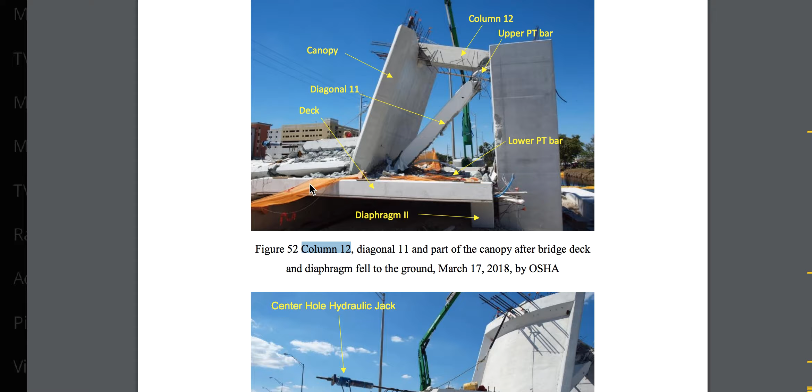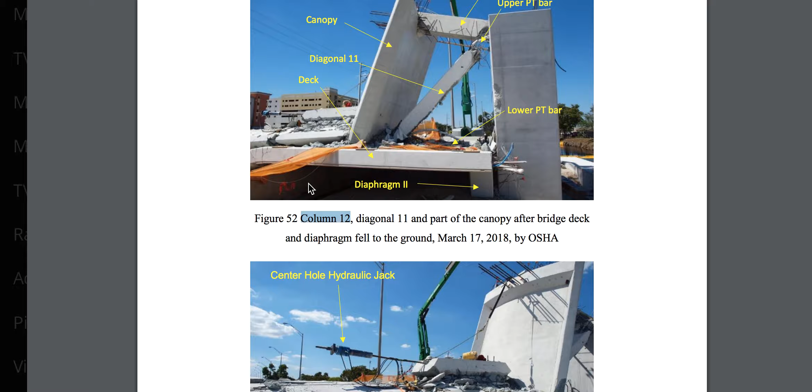Let's go shoot into this report real quickly. I want to talk about a couple of mistakes in the report, or logical mistakes that are here. But I'm only going to point to one now for food for thought.

The center hole hydraulic jack. We see it's attached. It's reported per this OSHA report that they finished the cycles at 50 kips per cycle.

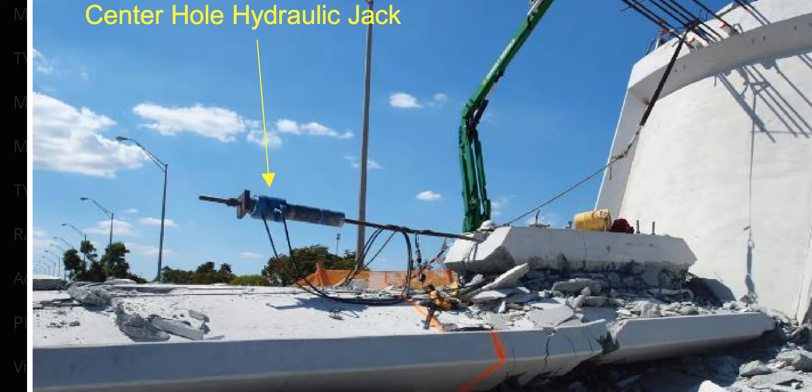So I'll search now this document. Let me type in here real quickly. It's going to pull up what we need to see. I type in the word 50.

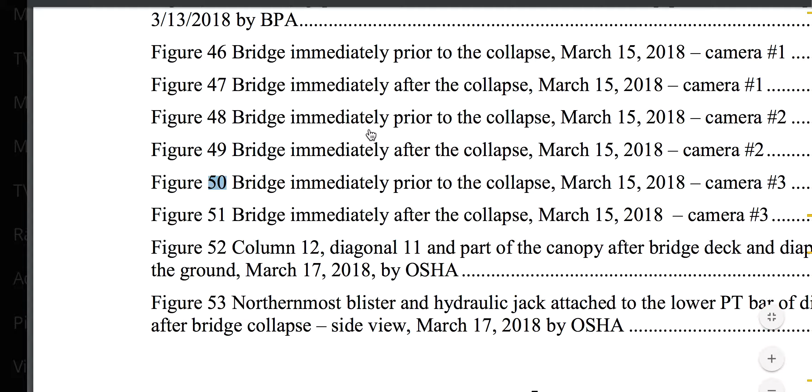I get 11 results. As I bounce around for 50, we see right here that on March 13th and the 15th, FIGG instructed the contractor to retension the two post-tension bars in diagonal 11 to a force of 280 kips, each incrementally, so A and B, in that member 11. Incrementally with approximately 50 kips retension at a time, alternating between the upper and lower post-tension bars. That would be A and B.

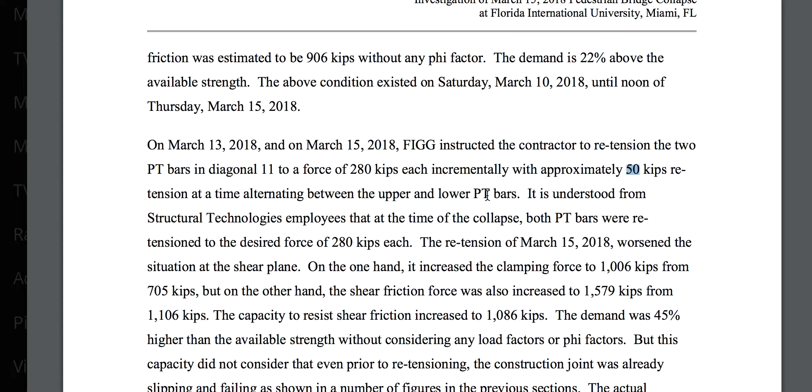It is understood from the structural technologies employees that at the time of the collapse, both post-tension bars were retensioned to the desired force of 280 kips.

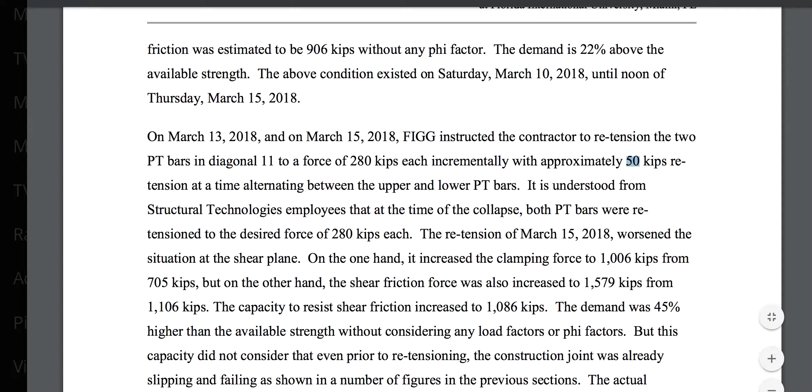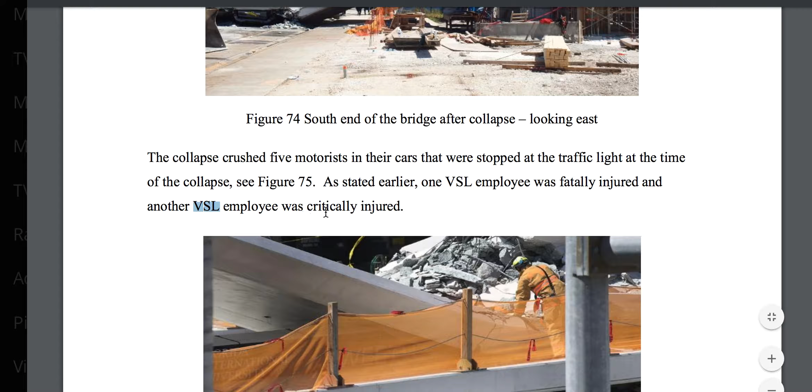Okay, let me see if I can find that location for you. I stated earlier, one VSL employee was fatally injured and another VSL employee was critically injured. That's the one that's not of his right mind now.

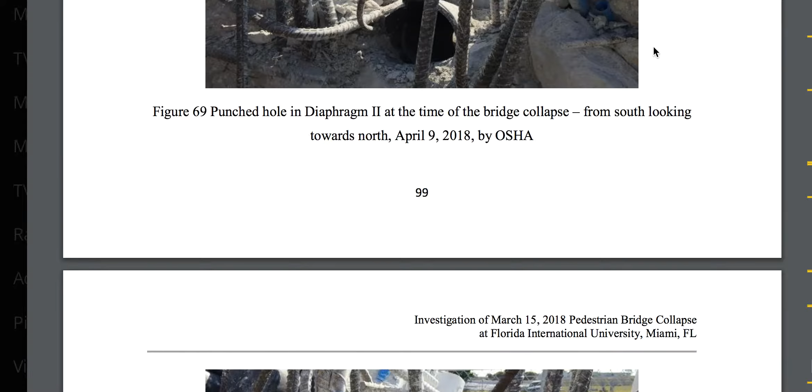They're supposed to be so great, in South Florida, supposed to know what he's doing, and yet he didn't stop himself from post-tensioning here. So obviously, he's not that great. And now he's resolved himself out of the gene pool of greatness.

VSL, the 6th person was the MCM. Okay, right here, a crane was available at the site to position the jack and attach it to the bar being tensioned. There were 3 VSL employees.

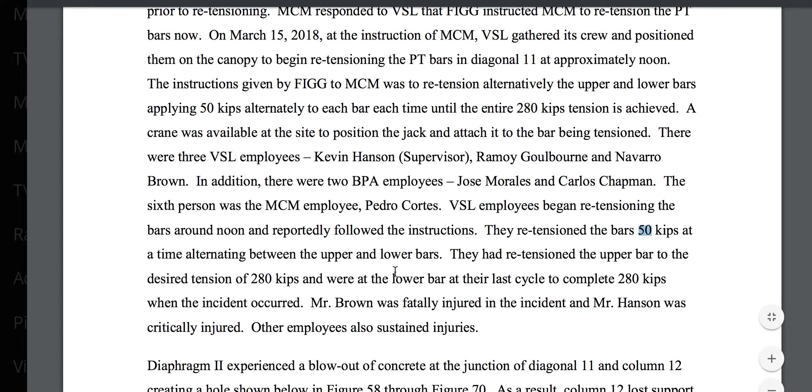Kevin Hanson, brain dead guy now, pretty much brain stupid. This guy, Ramoy Goulbourne, would be the only one that would know if they finished it, because it stated that VSL, via this report, is stating that VSL is the one that identified him as telling it. They retensioned the bars 50 kips at a time, alternating between the upper bars right there.

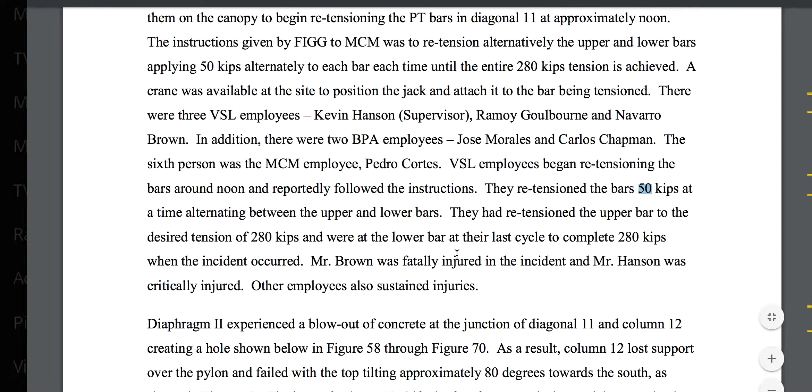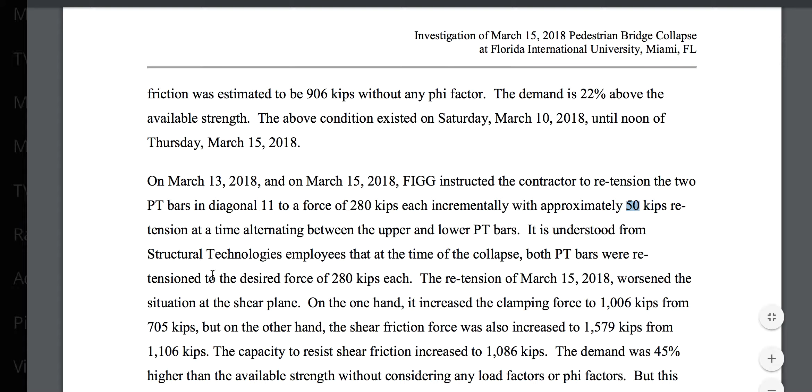So how do we get down here where he states, the report states, it is understood from structural technologies employees with an S that at the time of the collapse, both PT bars were retensioned at the desired force of 280 kips at the time of collapse.

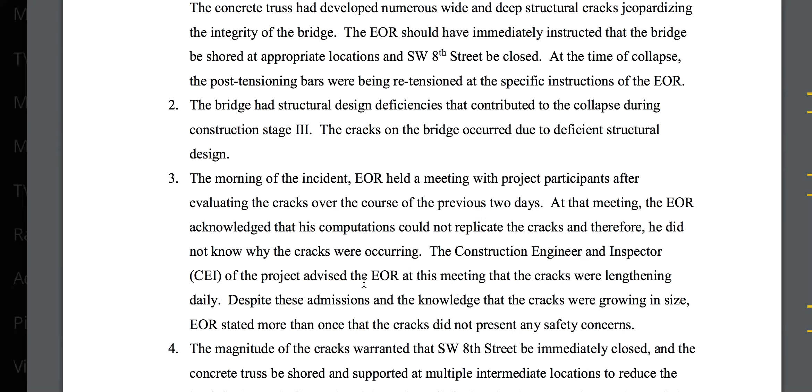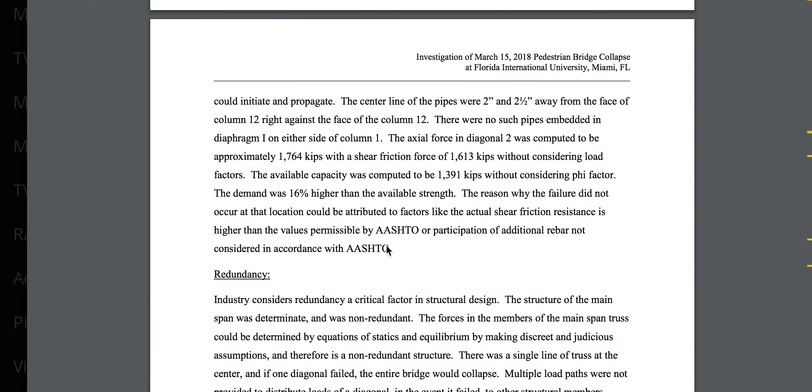So they should have been saying they were removing the equipment then, and then the collapse happened. Not 'we just finished it.' We just got to 50 and the bridge collapsed. So that to me, and you have to trust the VSL employees for their data, and it would be one employee. The other two are, one is dead and one is absent of mind. Yeah, I have no pity for him. Sorry, guys, I'm not down with that.

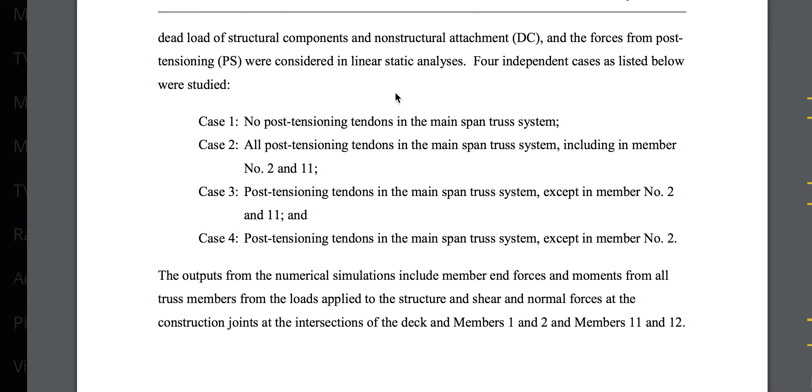So now we come here to the report still. Let me show you an image. I already showed you the machine still there. In this report, they show the images just before the collapse.

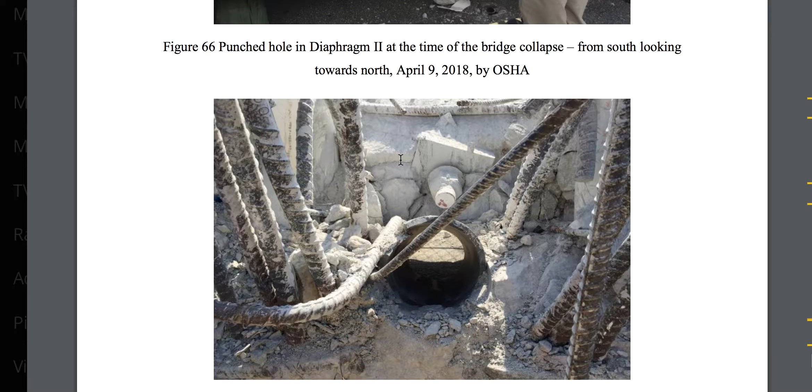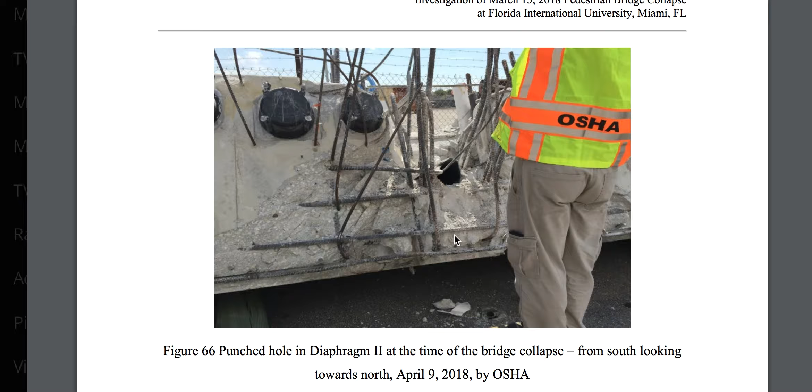I'm also going to state that the blowout was not a blowout, but it was a lift off, and that's because the blister back here sticks out approximately 10 inches. It jacked it when it hit the pier. It forced this up and off, and that's why you see all the rebar, the reinforcement, in a vertical upright position, not pushed away towards us.

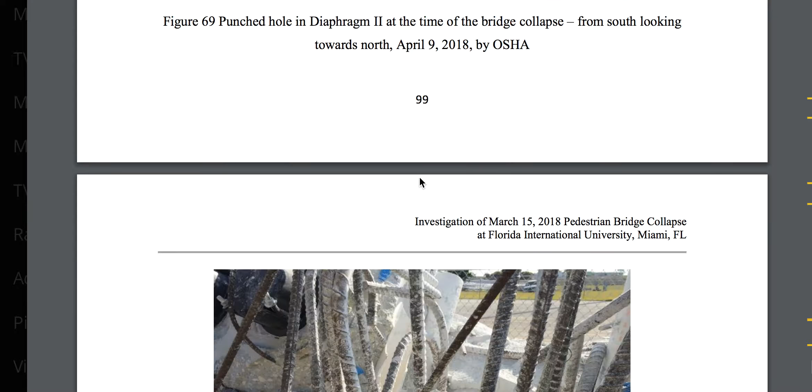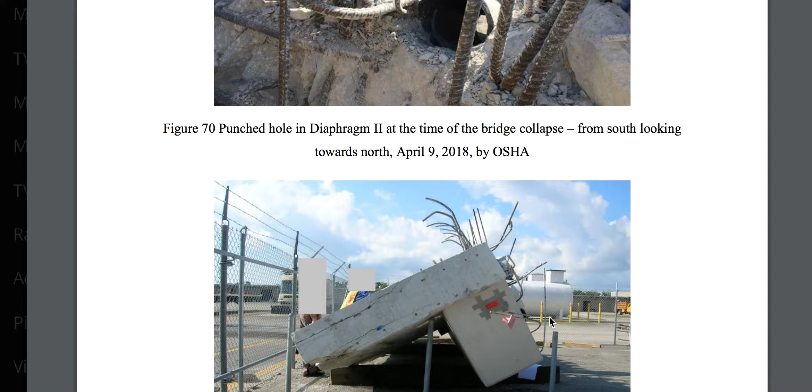And if you look at the pier, it didn't rub against the pier on the way down. You see the caps are in great shape. A couple of reinforcement bars stuck out to begin with, but it looks like this. That blister was out here. As it fell free, it sheared that off and lifted that up.

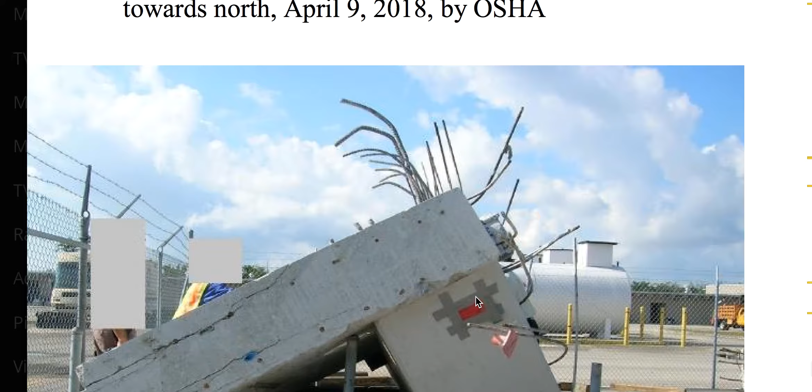You see what I see there, right? It looks like the black pipe sticking out, but yet we don't see that. We see it way back here. This pipe tells a story on how it's sheared also.

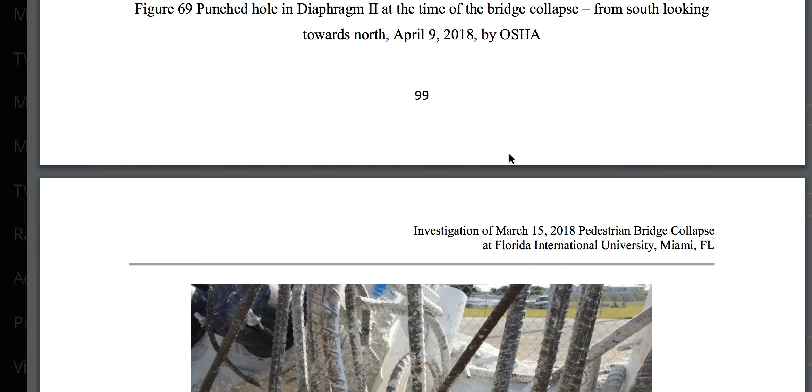Did it shear up or down? Well, the reinforcement goes up. So this would be what a break looks like if the forces were coming from the bottom up in a confined compartment. This would create a hinge effect in here because of the confinement, and also number 11 is part of the confinement. The two forces meeting create the breakage we see between 11 and 12.

Now let's go to that image I just showed you, the one I just mentioned.

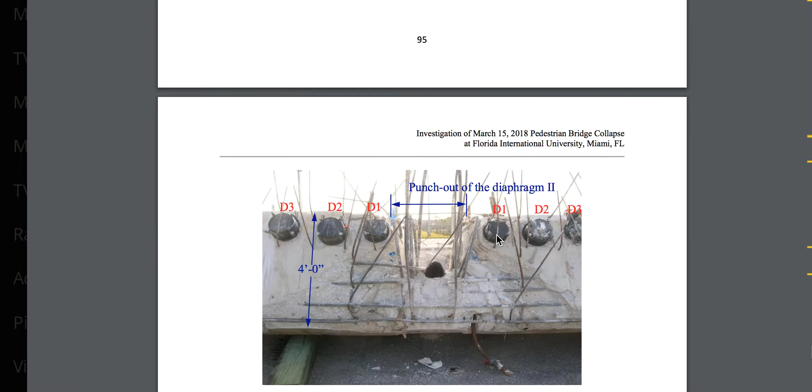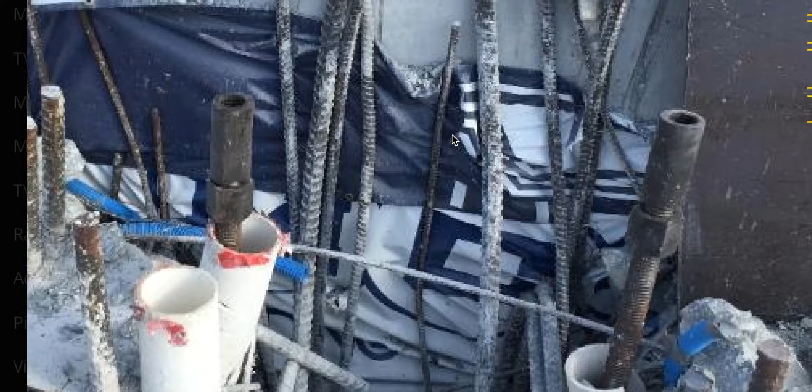For clarity, you might think the rebar was straightened up sliding down the structure. Here's proof of that: these scratches. These scratches are from smaller pieces of rebar sticking outside the deck, not here, as you don't see any rub marks on the back of these.

Also, this reinforcement here isn't touching. It may look like it is, but it's not. Let's use that one, perhaps that one is. But I went over that in another video of mine.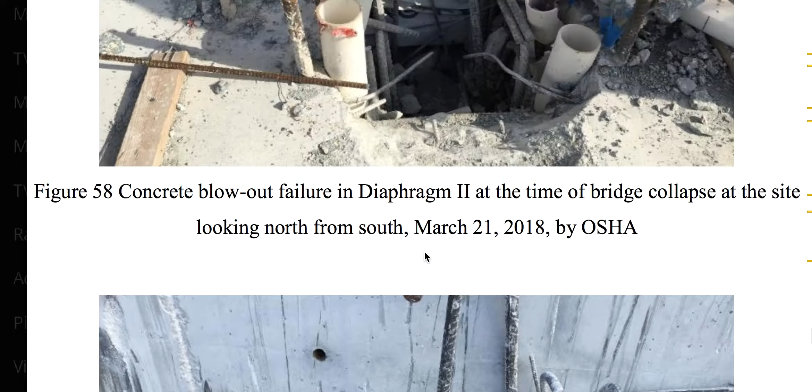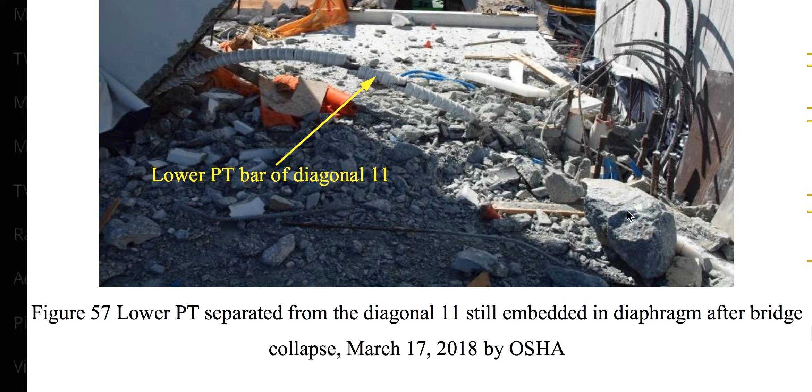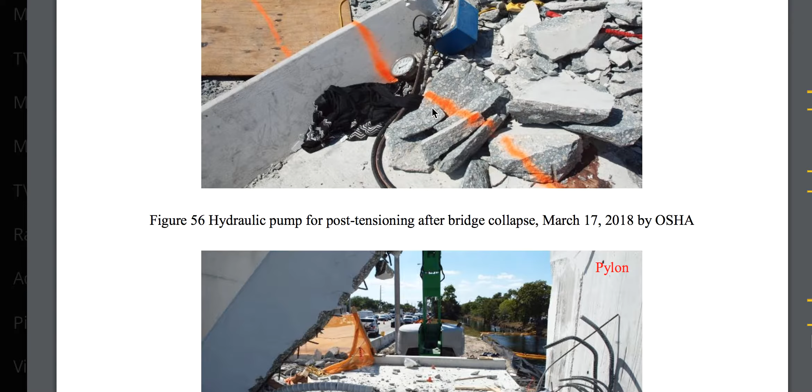There's a nice chunk of concrete here. I'd love to know if this is the back of 12, the bottom of the deck, part of the canopy. The shearing didn't take place as they report, because here it is - it was mechanically sheared afterwards, but the report alludes that it was sheared somehow, like during a failure.

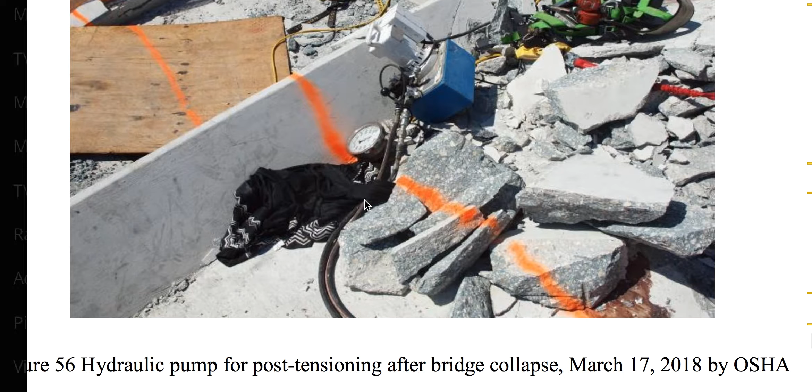The photographs amazingly get pixelated in this day and age. They have terrible quality, so we can't do what we're doing here. This equipment is still there, attached, so they finished just at the time of failure, right here. I find that very hard to believe.

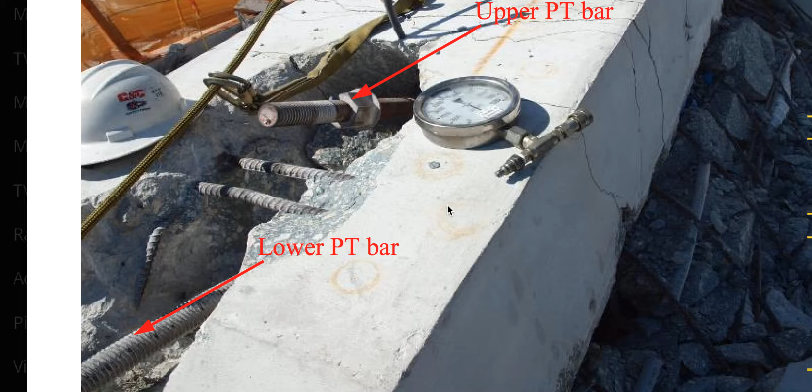Also, it's only one person stating that, not other people. They photographed this but don't show us the very end. You could have counted the thread counts on that, and it would have given us data.

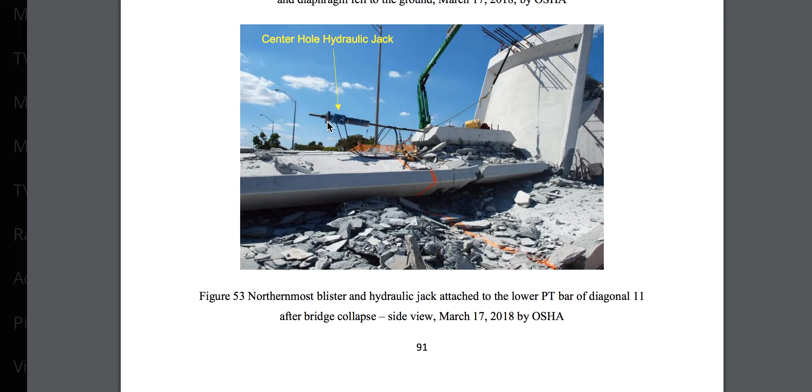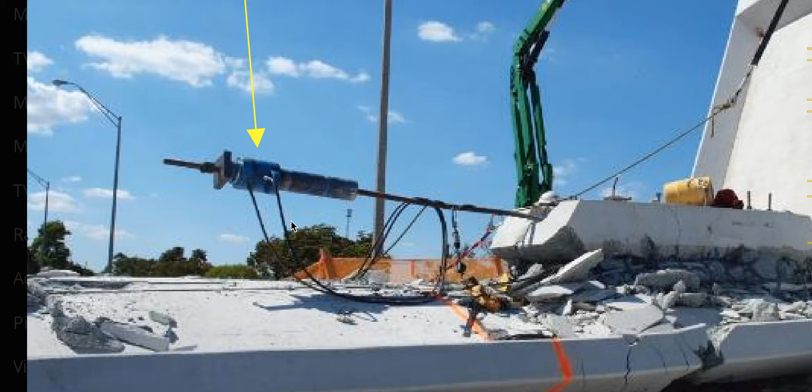So what are they going to say - were they removing it at that time? The crane's gone now, but we'd like to see the crane connected to this. How much does this equipment weigh? Was that what the manpower was up there for? I don't know - were they trying to move that by hand each time?

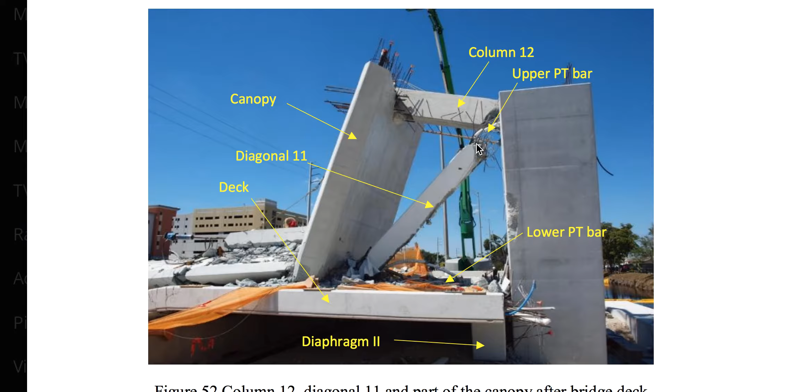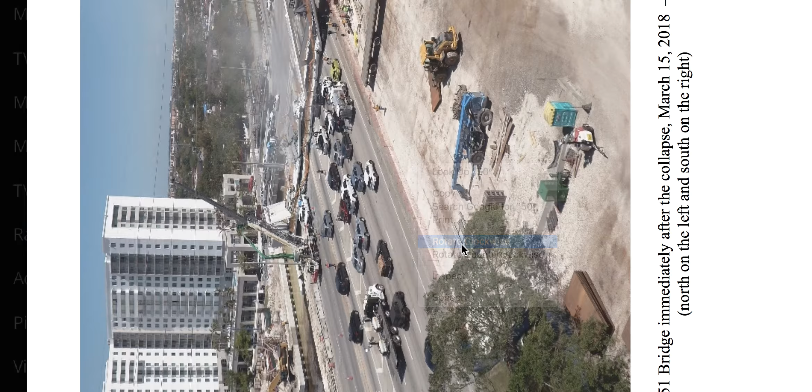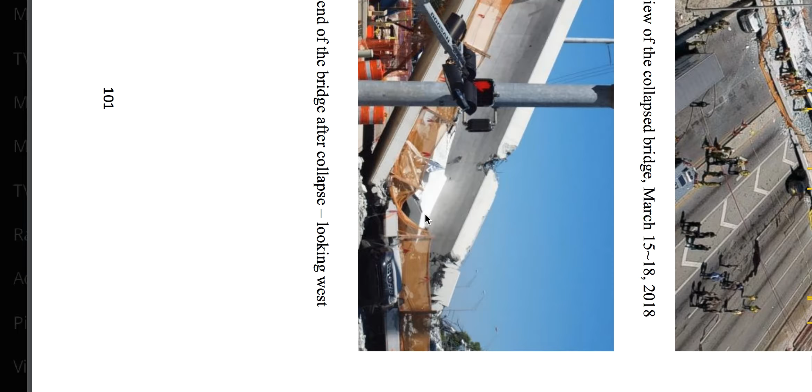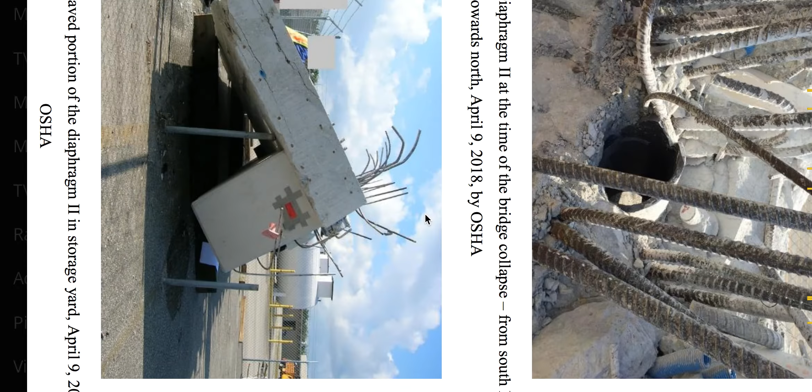Oh, we did that. Okay, hold on - the photographs are going to orient. Obviously I got a turn of events on me. Let me scroll up still, bear with me on it please. We're going back to that same image.

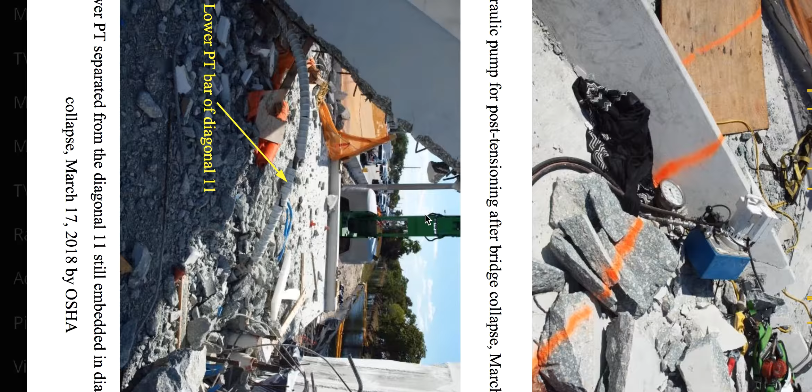I'm going to show you that, as the report stated, they were just finished post-tensioning before the failure. Here's the failure - take note of the oil truck right here. This appears to be an oil or septic truck. Let me zoom out.

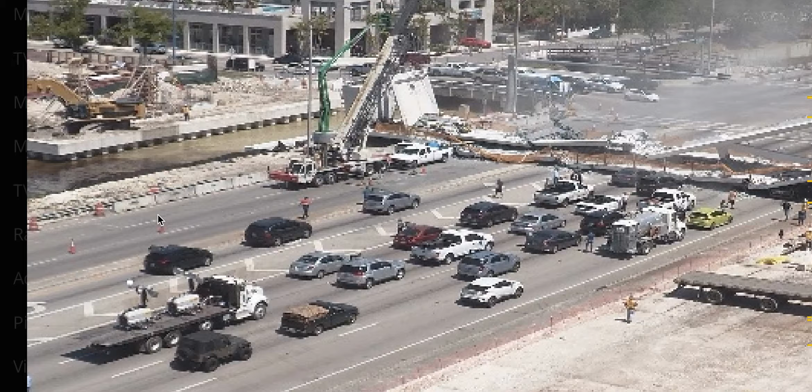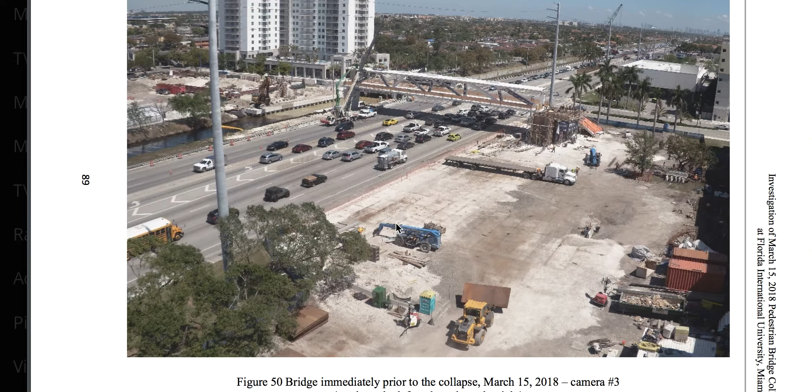Pixelation - take note of the pixelation. It seems to be unjustly located at where we're trying to look. There's the oil truck again, right here, this truck is here. So this is the image before the collapse.

Well, I'll accept that. And look what we have - a huddling of people there. One's going to be dead, one's going to be brain dead, and the rest are mute. They lost all their voices.

Except for when they said they post-tensioned everything. So I think the jacking was still going on at the time of this failure, but they want to pretend like it's not - that way they can say they weren't doing it, that it shouldn't have been post-tensioning.

We need to see the raw pictures in this. The pixelation can work in your favor if you can find the symmetry of pixels. I think I spoke to Doss about this - see, Doss, when I zoom in, notice the pixels. They tell a story - the straightness tells a story.

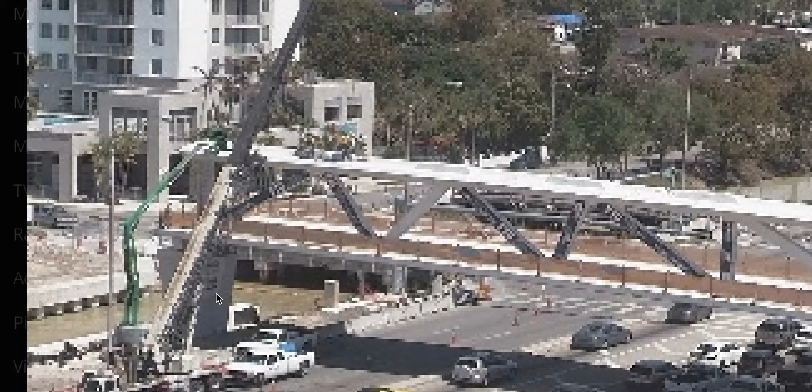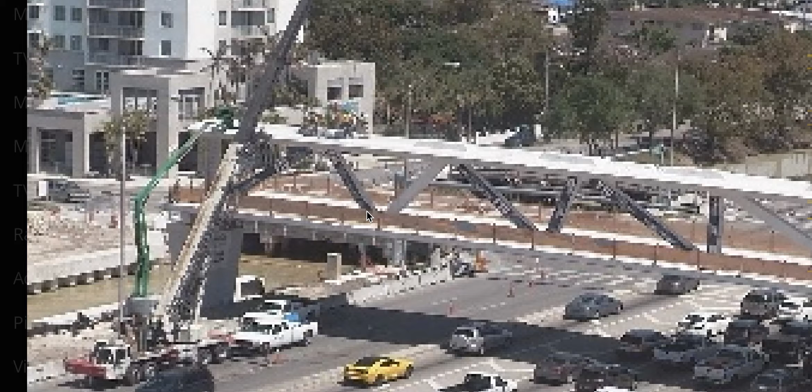A little wave there, maybe right before failure, as they stated. But I don't know if that wave is an artifact, as we refer to it in photography and digital reproduction - it's one pixel trying to guess what the pixel next to it is doing. We don't know the camera; if we knew the camera we'd be able to figure out what's going on too. But that's just before the failure.

Terminating the video, just wanted to give you guys food for thought - they stated they finished post-tensioning when the bridge collapsed. Does this look like they finished? This looks like they're all huddling up there, doesn't look like they've all taken off.

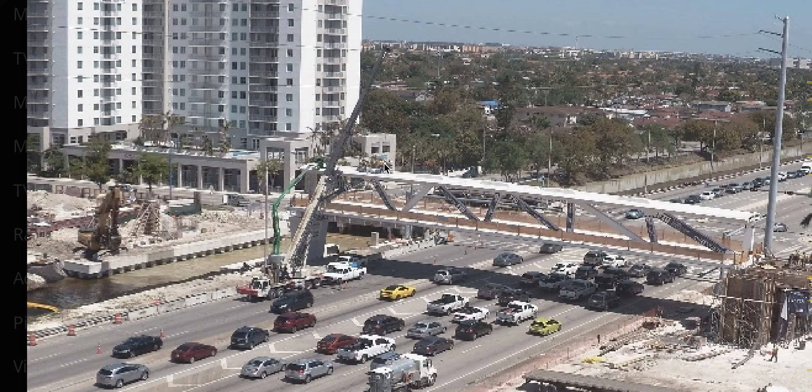They did not state the obvious, that we finished post-tension. We were removing the jack when the bridge failed. That's the obvious that should have been stated. I'm terminating the video.